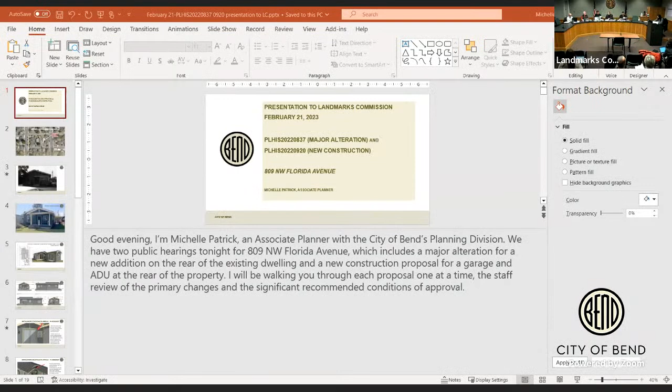Thank you, Gary. You're welcome.

So we are here today with a presentation to the Landmarks Commission for two projects at 809 Northwest Florida Avenue. We're going to go through these one by one. The first is a major alteration to the existing dwelling in the form of a new addition, and we also have a proposed garage ADU at the rear of the property.

My name is Michelle Patrick. I'm an associate planner. I work with Heidi on historic preservation projects.

So we're going to start with a little bit of an overview of the property. It's 4,560 square feet in size. The property is located on Northwest Florida Avenue between Broadway and Wall Street, and abuts a 12-foot wide gravel alley to the south. The main zoning district here is RM, medium density residential.

The property is developed with an existing 813 square foot craftsman style bungalow, constructed in 1923, designated as historic contributing in the Old Town Historic District. Photos from the applicant are primarily from the 1990s, but the earliest photo of the property is from 1960. No other historic photos were available at the rear of the property, where most of the development is taking place. The primary facade faces Northwest Florida.

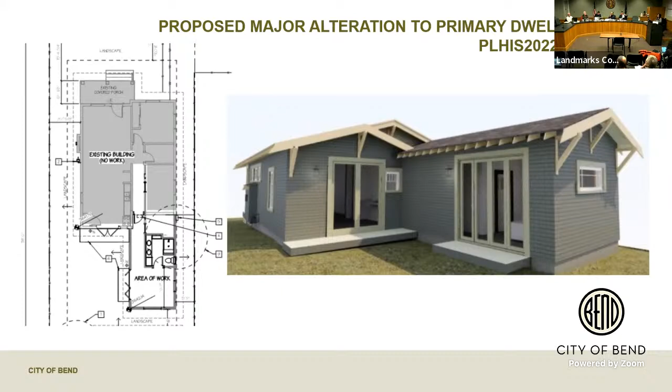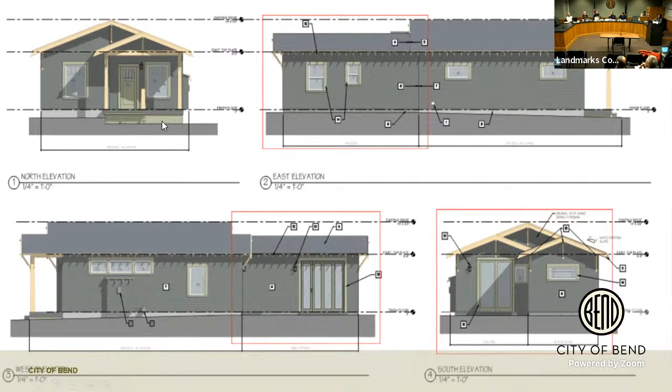The proposed details are generally in line with the craftsman style of the existing dwelling and include knee braces, exposed rafter tails, tongue and groove soffits, and smooth shingle siding with a 6-inch reveal. They've also got 2 new windows proposed on the eastern elevation, 1 new fixed pane window proposed on the south-facing elevation, and a bifold door leading out onto a deck on the west-facing elevation. As we can see here, none of these changes are visible from the front facade.

So I'm going to go through the areas we were looking at more closely and how this relates to the recommended conditions of approval. The addition is generally compatible with the existing dwelling in regards to height, massing, and the proposed solids to voids. That said, we do have a few conditions recommended to help ensure the integrity of the existing dwelling is maintained.

Some window details were provided, but we would like to see more specific cut sheets for the proposed windows to ensure the manufacturer can produce those specific styles, that they are aluminum clad wood, and that the proposed divided lights are external.

We were also a little surprised to see the proposed doorway on the existing dwelling is proposed to be widened. As shown in the plans, the applicant proposes to replace this patio door with a new doorway, but they also propose to widen the opening. This is part of the addition approved in 2013, so it's not original, but in widening the doorway they will be removing the existing trim along this window, which we found a little cramped. While we recommend allowing them to replace the door, keeping the doorway opening the size it is now would preserve the trim along the window and provide more space between these two features, which would be more appropriate.

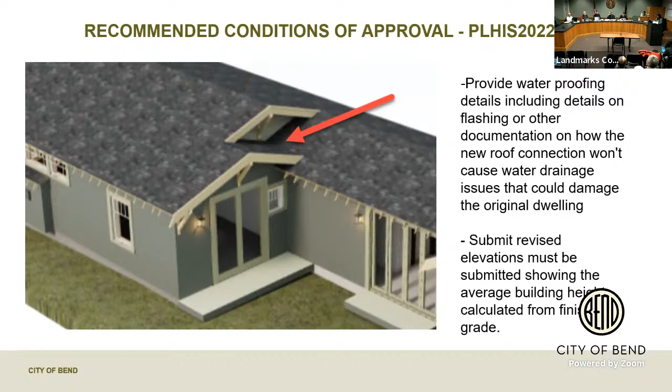Overall there are only 8 conditions. Some of the other ones not specifically referenced are pretty standard, just making sure we get all building permits in and the standards details checklist. This concludes staff's presentation on the proposed addition, and I'm happy to answer any questions.

Commissioners, are there any questions of Michelle at this time?

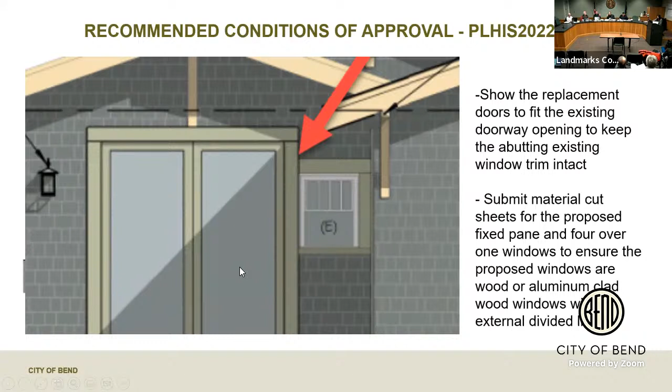Regarding the rear door with the tight trim, it shows an infill wall. Is it maybe just moving over? It showed an infill wall on the left-hand side in plan view. On the elevations, on plan sheet A2.1, detail 2, sheet note 2 says new wall infill. I'm wondering if it's not a sizing issue but a moving-the-wall-over issue, possibly to make room for the closet door to open or something.

Maybe we can let the applicant address that after. Mindy Lyman representing—oh yeah, okay, you'll have your turn as soon as we're finished with questions. We'll put that to staff, and then you're next, okay, we'll ask you those same questions.

Any other questions for Michelle? All right, thank you, Michelle. Mindy, now it's your turn. Okay, thank you.

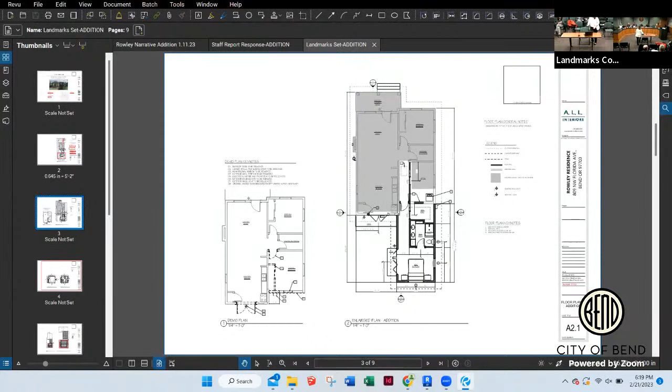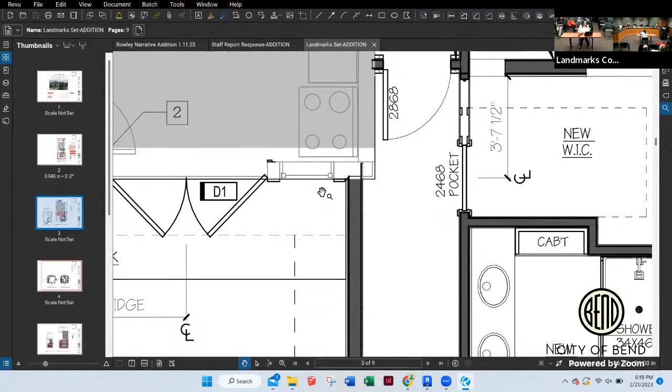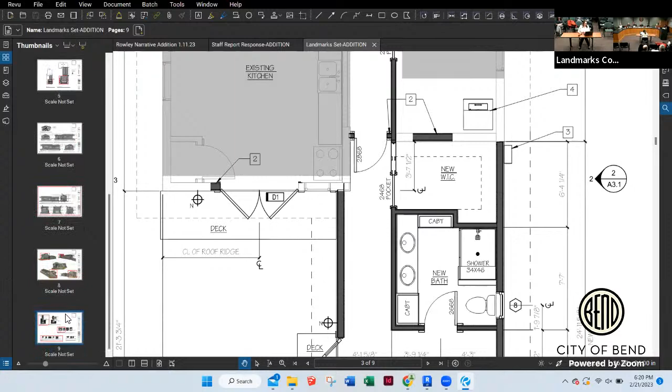We didn't want to move it. We don't want to touch it. We don't necessarily want to change it in any way. So we just bumped out the wall to the trim there. The exterior elevation then, and that door that Michelle was asking about.

Let me get to that. The door that's existing is a little bit in disrepair. We'd like to change it out. The owners would also like to add more lighting to the interior of their home. So we talked about widening it and making it a taller door. It was a 5.0, 6.8 or 7 door, and then we'd like to widen it to a 6.0, 8-foot door.

To get lots of southern light into the house as the owners would like. Also, the existing door is not centered. I can show a photo of that. So the other aspect was to center, pardon me, I need to pull up a photo of the original house, but it'll take me a moment. It's just off center to the west. So in replacing the door, we have also centered it over.

So it shoved it all towards the window. And we wanted to keep the window there without moving it. And so we wanted to integrate the trim work for the door as part of the window trim, so it would kind of act as both. Again, that window was put in as part of a 2013 addition there on the back, so it wasn't original, and neither was the door. We wanted to add a little bit more light, so that's where we ended up with this design.

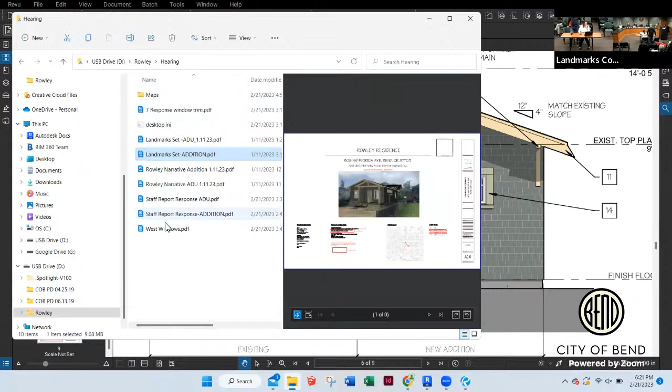Yeah, Vincent Rowley, I'm one of the owners, and I agree. I don't like the looks of it particularly, but it all fits in and it doesn't beat me over the head. So yeah, I agree. Another solution would be better, but it's really dark in our kitchen. It's just crazy dark. And the door that we're changing out was a salvage door that I put in, and it's starting to fail.

So we want to put in a clad door. So here's a photo of the existing conditions as they are right now with the new addition there and the door that they have put in that's failing. You can see there's just a tiny bit of siding between the two window and door.

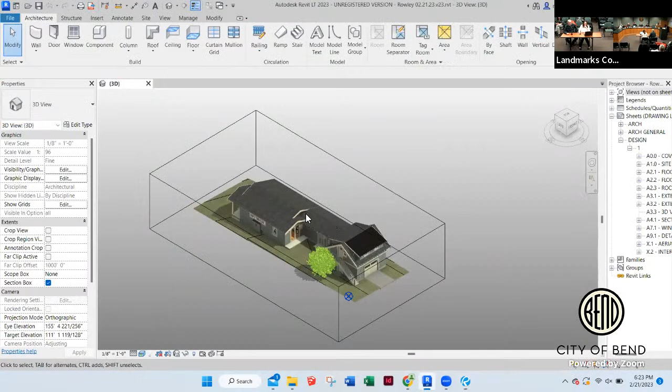Other questions for the applicants? I was a little concerned about where those two roof pitches come together that Michelle mentioned where, do you think there's going to be room to keep that knee brace if you do a cricket up there?

I don't know yet, but we're going to put a cricket in. Yeah, and we can shorten up. The knee braces have, I don't know, 6 or 8 inches. I built those knee braces out back out of salvage wood from the job site. So I can change that one proportionally and make it fit in. I mean, it's just a site thing.

Yeah, we'll look at the cricket and see how high that needs to go to the wall. Make sure we can maintain it. Otherwise, I don't know how to solve it except to adjust the size of the cricket, or I mean, the knee brace, somehow.

I have a question about the front porch. It looks like there's a little post left over. Oh, so now you want me to finish my front porch too? She's got a tough crowd here.

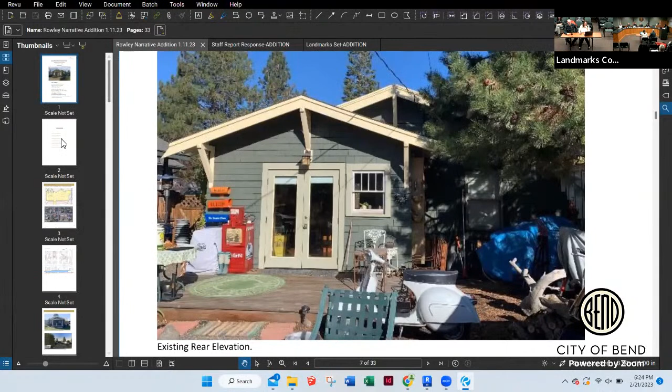I just don't know if that was a condition of approval. I'll finish it, yeah, it's unfinished at the front. I never finished it from 2013. I have the fir steps, the treads and everything in the house, I just haven't got out there and done it. We're living here permanently now, so it's more expedient to get the ghetto house on the block fixed up. We've got kind of a rough block, and this will help it a lot.

I have other questions and comments, but I want to give the applicant a chance to finish their presentation. The item about the door and the window is really the only item we wanted to see if we could maintain the design as it is, just to keep the light in the home.

The other items, I think we can accommodate - adjusting the roof height from grade, looking at the watershed, making sure we're maintaining all of the site. That was another condition of approval, the cricket, the exterior details, and all of that provided.

We're going to use Pella doors, and the divided light windows are going to be the ones approved by the National Park Service. They look like they have putty for the mullion. So they're the most expensive, unfortunately, for us, but they'll look the best too.

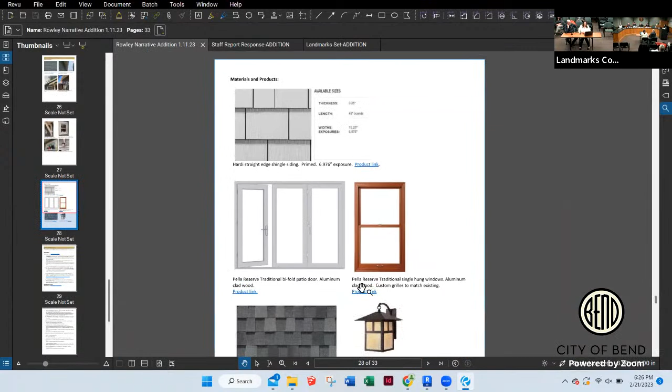In our narrative, I know I didn't do this the preferred way, but we provided some links to the products. Click on that and go right to the product, but spec sheets can be provided. That's the preferred method - we'll get all that stuff for you.

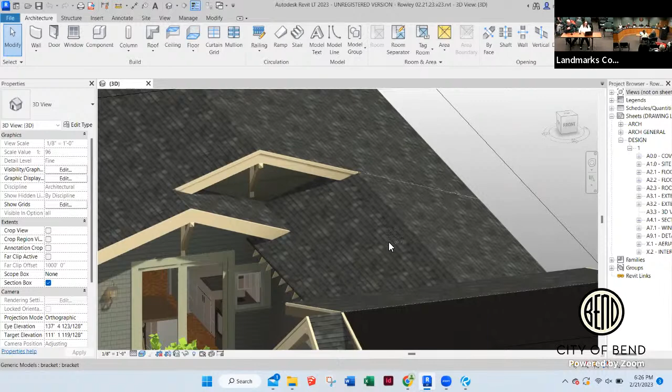We're just trying - we moved from 2,500 square feet to 800, and it's untenable. We don't like each other any longer, so we need someplace to hide out. We need a bedroom, and we're going to move our laundry from the kitchen. It's just making it more efficient. It's just too small.

And we're trying to do it in something that looks similar. Other questions, Jim?

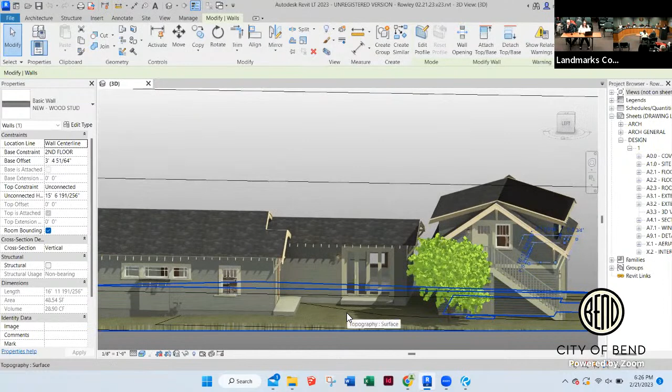There are questions and comments, probably more, some directed towards the applicant. In the staff report, there's no stormwater plan or landscape plan, and there's an opportunity to combine the two. Particularly looking at what's there now, there's not much landscape other than the apple tree - which, not an apple, but anyway.

What kind of tree is it? That's a good question. It's got berries and nice blooms in the spring. We like it, it's a cool old tree.

Yeah, because when I saw apple and the space that it was in, I was going to point out you were going to have problems with it in the future, and it might be good to include it in your landscape plan as removing it and replacing it with something more applicable or appropriate.

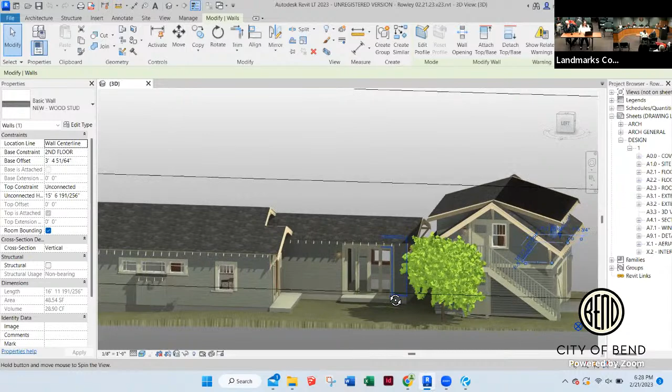I was also looking at that corner where the new portion of the structure joins the existing structure, and where the gables, the pitches hit. You've got a significant problem in that corner with water coming down onto your porch. It's going to come down that gully, hit the other roof, run around the edge, and down into the corner of the porch. Your stormwater plan should address that as well.

I'll save my other comments, because they're really just about some of the other drawings, not significant at this point. They're not really questions to you as much as back to the other commissioners and staff, so I'll wait till we go into deliberation for those.

Any other questions for applicants? Do you have plans for gutters and downspouts? We haven't really discussed it. I think drainage plans will probably help. The original house had no gutters, and the rafter tails are at the goofiest angle I've ever seen, not conducive to a gutter. They'd have to be modified, if not nipped off, which would significantly change the look of the house.

I don't know if I'm going to be looking at that in the future. So far, everything we've had for rain and snow just hits the ground and seems to disappear.

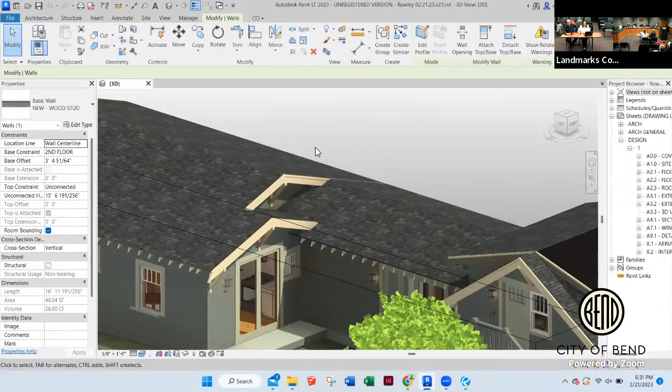The addition is going to have different kind of exterior light from the original house? Or are we talking about the ADU having different kinds of light? I think they want the ADU to, because there's an existing light there currently that was approved. It doesn't affect much, it's just a little area light.

Okay, all right. Any other questions? No? Okay, thank you very much. Any other questions for Michelle before we close the hearing? Michelle, do you have a comment that you'd like to make?

I would just add about the lighting. All lighting will need to meet the development code, which requires it to be fully cut off and shielded downward. I'm not sure if that was looked at in 2013, but any new lighting you put on the addition or the ADU will have to meet that. So based on the pictures you have now, that's not one we would allow. There may not be an opportunity to match those as they exist.

But we can talk about fixtures when you get to that point. No, downward type of lighting. Okay, all right. Well, then we'll go ahead and close this hearing.

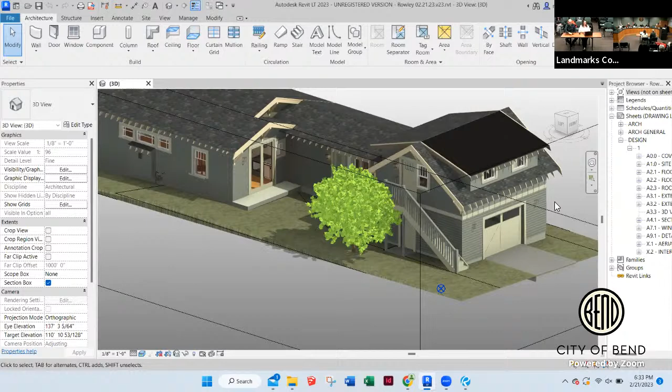Comments from commissioners? Anything? Sure, I have a couple of comments just about some of the staff comments about the windows under the eaves. In particular, I just wanted to point out, when you look at the elevations that were presented, the view line is well above street level.

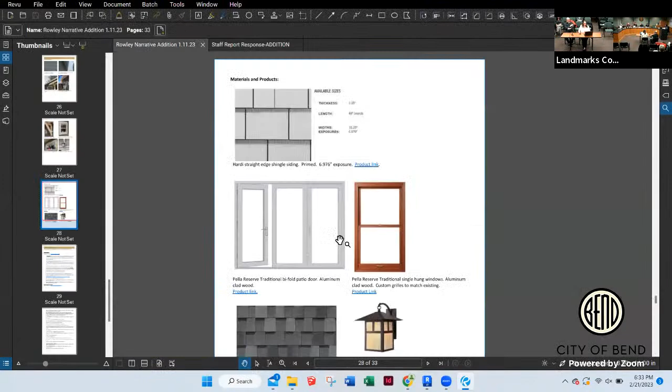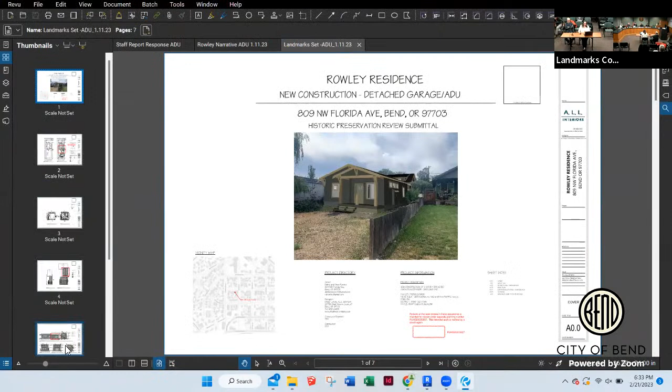And I think that's what the next project, on the next one. Is it, am I looking at the wrong one? Well, I think the comment was made in a couple of places. And just the street view from a person on the street, I don't think the conflict will be an issue. You will see the top trim, just because there's no solid underlayment underneath the fascia board.

But, quick comments for commissioners? Comment for the commissioners? Any?

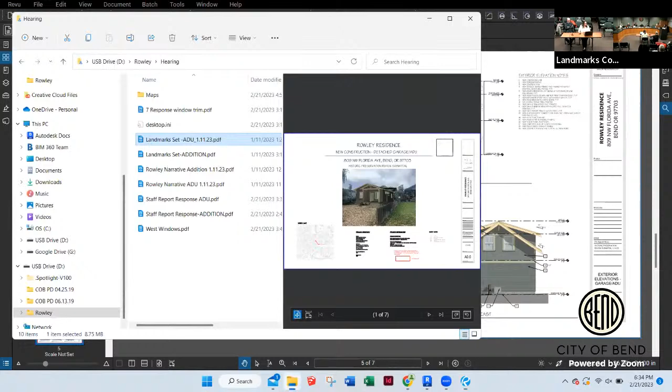Yeah, and well, I'll say on the east elevation, there's really no distinction other than foundation between the original and existing. The foundation is shown differently. It is right at the 5-foot setback, the side setback. Not a lot of width to work with there. And I don't really see any opportunity for like a jog or a trim piece or anything else.

So I think consistent with how we've approved a lot of other applications, I would say that the foundation serves to distinguish between old and new in a sufficient way to meet the Bend Historic Code. The differentiation you're looking for? Yeah, the differentiation. Oh, the roof line does give you a natural break line too, as to the addition versus the original.

You know, with landscaping and planting, the foundation is going to be all but invisible within 10 years, in theory.

Other comments? Then I will entertain the motion. Oh, Kathy, do you have any comments?

Oh, yeah, her hand is raised. Is she there? Oh, she can't talk. Unmute her.

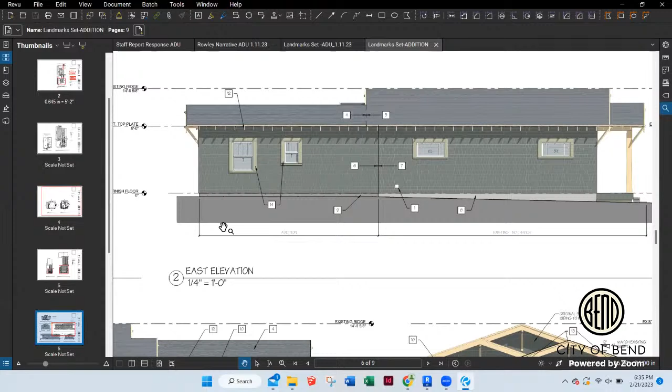I'm thinking about the trim on that back door and the window, and I believe I've seen examples of what they're proposing in other houses in our neighborhood. Given that that was an alteration in 2013 for both the door and the window, I don't see any problem with the new solution they are proposing.

All right, super, thank you. I will entertain a motion.

Mr. Chair, I'll make a motion that we approve with all the staff recommendations minus the recommendation to alter the south facing double door.

Okay, and this is the ADU. Let me have his recommendation. Maybe that's right here, Jerry.

Maybe it's not. That means an approval with the recommendations: number one, building code permits; number two, standard details checklist; prior to issuance of a building permit, the submitted site plan must be revised to deal with stormwater. The fourth recommendation, exterior lighting shall conform. That was one of the recommendations. That's a flare down. Building permit revised elevations - the plan must be revised to show the replacement doors to fit the existing doorway.

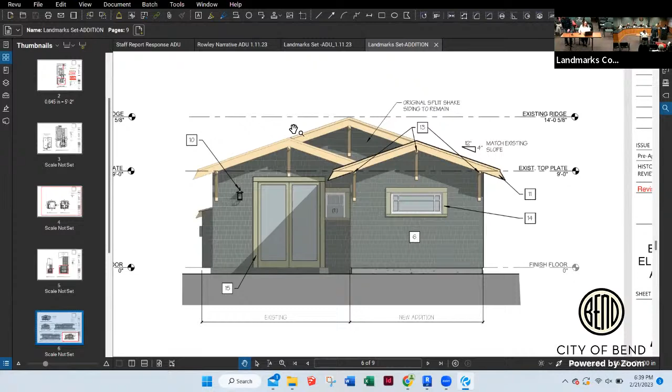The addition is approved. Okay, now let's move on to the ADU. I lost my sheets again. Maybe I'm gonna steal the screen from you. Okay, briefly, and then I'll have it back after. Don't need to do anything to let you have it. I think I got it still, yeah. All right, now that takes us to item 5 on our agenda.

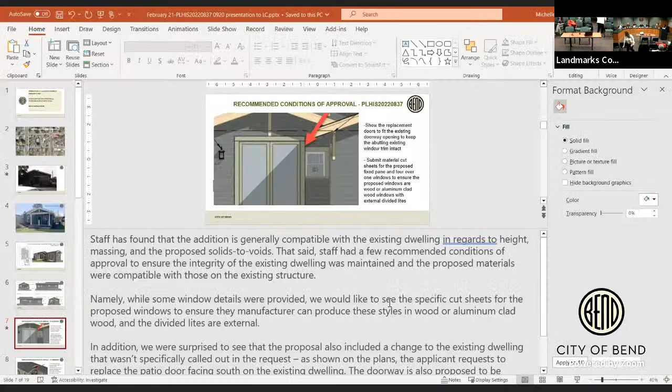Public hearing PLHIS 202209220. This is the de novo hearing and is an initial evidentiary hearing of PLHIS 202209220. This application is a request for a garage and ADU, accessory dwelling unit, at 809 Northwest Florida in Bend, Oregon. The applicant has the burden of proving that he or she is entitled to the approval sought. The applicable criteria for this application include the Bend Urban Area Comprehensive Plan Chapter 3 and Chapter 10.2, Historic Preservation Code, and the Secretary of the Interior's standards for the treatment of historic properties.

Testimony and evidence at this hearing must be directed toward the criteria set forth in this staff report or other criteria in the Bend Comprehensive Plan or Bend Development Code that you believe is applicable, or any other criteria in the National Register of Historic Places program that any person believes apply to this decision. Failure on the part of any person to raise an issue with sufficient specificity to afford the landmarks commissioners and parties to this proceeding an opportunity to respond to the issue precludes appeal to the City Council or Land Use Board of Appeals on that issue. Additionally, failure of the applicant to raise constitutional or other issues relating to the proposed conditions of approval with sufficient specificity to allow the Landmarks Commission to respond to the issue precludes an action for damages in circuit court.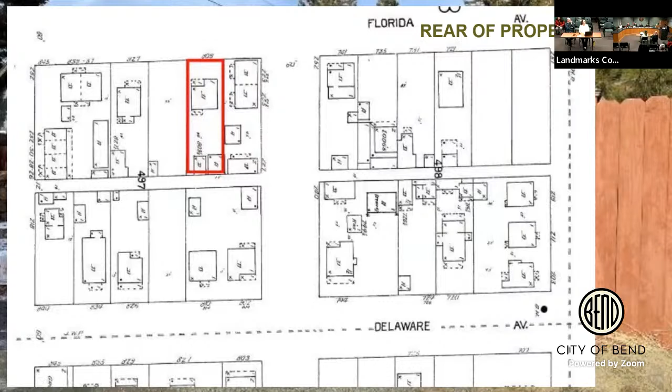So the new 2-story structure incorporates craftsman details very similar to the proposed addition that we just looked at, including aluminum clad wood windows, knee braces under the gabled roof line, exposed rafter tails, tongue and groove soffits, fascia with 2-inch trim, and straight edge single shingle siding with 6-inch reveal.

On each of these elevations, we've got 2 fixed pane windows with divided lights proposed on both the north and south elevations on the dormers, and on the 1st story of the north facing elevation. The east facing elevation contains 2 4x1 single hung windows, and the west facing elevation is entrances, so you've got a man door to the garage, your primary entrance for the ADU, and another 4x1 single hung window just adjacent to that door.

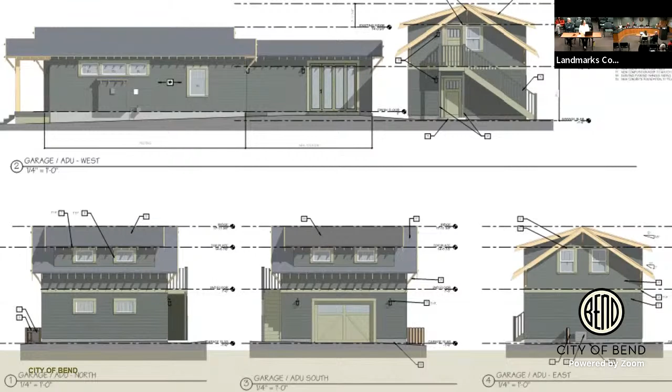I did want to talk about building height for a little bit here. The burden of proof continually references the proposed height of the ADU at 17 feet, 11 3/8 inches, and that is shown on here as well. But this is measured from finished floor, and building height needs to be measured from finished grade.

When we measure this from finished grade, the proposed ADU and garage is actually 19 feet, 5 1/2 inches in height. Keeping that in mind, the applicant did provide some detailed information on how this perceived height is actually a little bit less. They are proposing to grade the rear of the property, and you can see a little bit of a slope going back towards the alley, so the garage will sit a little bit lower than the existing dwelling. They called out 14 inches, but that's again measured from finished floor, so it looks like it's about 10 inches from finished grade as far as that elevation difference.

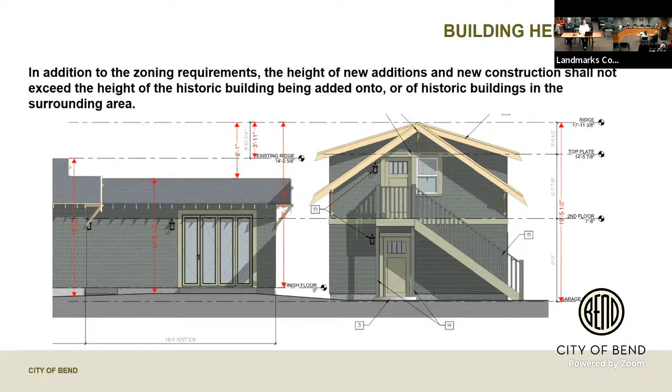All in all, the 19.5 feet does exceed the height of the existing primary dwelling and the historic contributing garage, which is the nearest historic contributing structure to the property, just directly behind it. This is 810 Northwest Delaware that this is addressed on. I don't know the height of this structure per se, but it looks about 15 feet, and I'll let anyone refute that if they have a better measurement estimate.

But so in general, this block does not have that many contributing structures on it. The nearest one on the block is 827 Northwest Florida, which is 2 properties away.

This proposed structure doesn't necessarily exceed the height of other historic buildings close by, but there are a number of examples in the staff report showing new construction or historic buildings being around 20 feet or more. So it is comparable in certain ways.

The applicant also provided an exhibit of the slope on this block. You can see, just looking at the property at 809 Florida, it drops down slightly from right to left. So the perceived height of the garage and ADU at the back of that property will naturally be diminished due to it being at lower grade than the properties further west, and the other historic contributing dwelling on the street, 827 Florida.

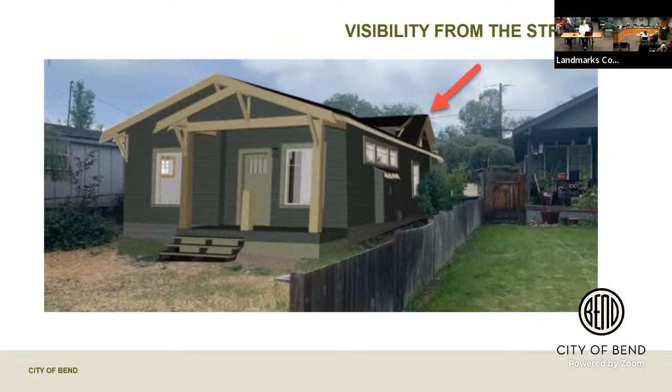This is a rendering the applicant provided that shows the ADU's visibility from the street. These are only renderings, so this is approximate, but I think it helps demonstrate the potential view from Northwest Florida. This existing tree, of undetermined species, will help screen it slightly from view. And notably, there's another large willow tree on the neighboring property to the east that will also help screen it from view on the other side.

Based on the proposal, we do have a few recommended conditions. First and foremost is making sure the height proposal is shown accurately, so we'll ask that these elevations be revised to show it from finished grade and calculate the average building height, so we have an accurate idea of what's being proposed.

We're also recommending that the applicant provide additional grading details in the form of a grading plan, so we have a better idea of the extent to which the rear of the property is proposed to be graded.

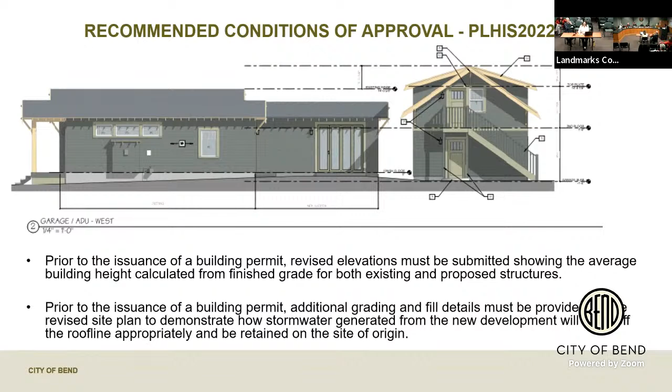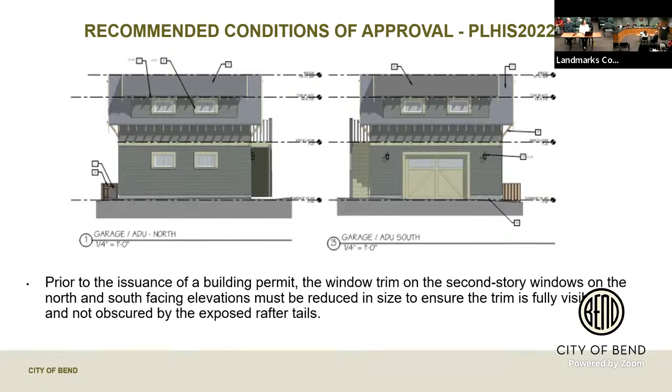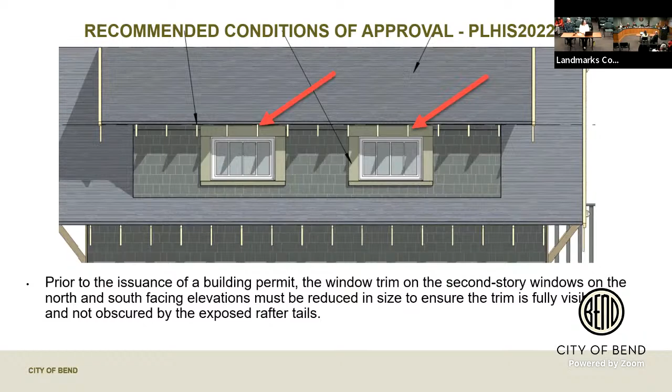Moving more into the design of the garage and ADU, we had several recommendations regarding the proposed windows. The second story windows are slightly obscured by the rafter tails extending from the eaves along the north and south elevations, so we recommended the window trim be reduced in size slightly to ensure it's fully visible.

Similarly, the placement of windows and doors in the east and west facing elevations leaves them partially blocked by the fascia board. Along the east facing elevation, we recommended these windows be reduced in size so you can fully see them, or preferably that there be one window on this elevation, which is common practice under gabled roof lines in the historic district.

On the west facing elevation, the issue of trim visibility is replicated. We recommend the door be relocated a bit further south so you can see the full trim and it's not obscured behind the fascia board. We also found that the 4x1 window directly adjacent to the door felt a little cramped under the roof line, and recommended a smaller window be installed with fewer or no divided lights to help keep the balance of glazing on this facade.

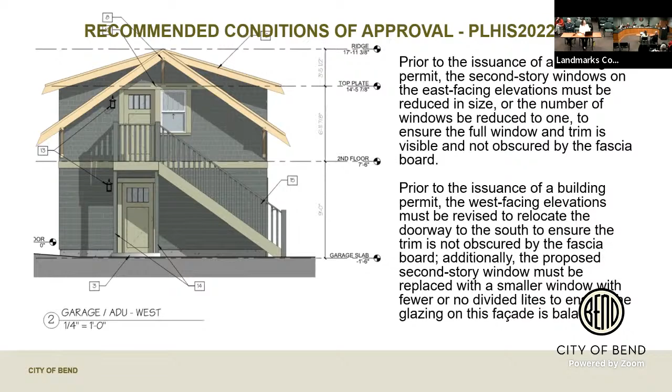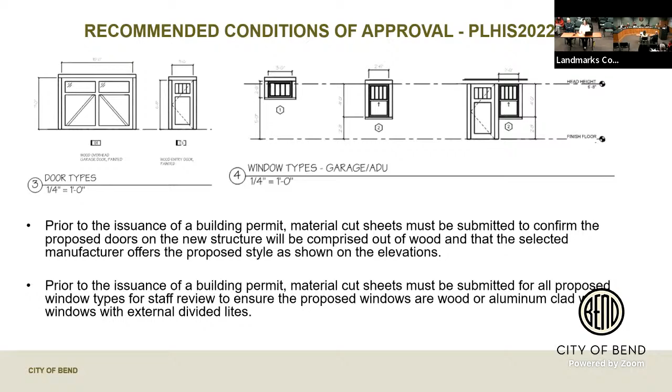This is just a general recommendation that more specific material cut sheets be submitted to confirm the manufacturer offers those proposed styles as shown on the elevations. We did get a very specific link to the overhead garage door, which I thank you for, and just to confirm all those proposed styles can also be produced in wood or aluminum-clad wood.

There were a few more recommended conditions of approval with this one that I'm sure we'll discuss. The ones not referenced were pretty standard conditions. I also forgot to mention we did have one public comment submitted prior to the hearing, in support of the proposal, and they also supported the addition. That's the extent of the presentation for the new construction.

Questions for Michelle and commissioners? No questions for Michelle? Okay.

Applicants, if you'd like to make the presentation. Thank you. I think you should still have the powers to share. If you don't, let me know.

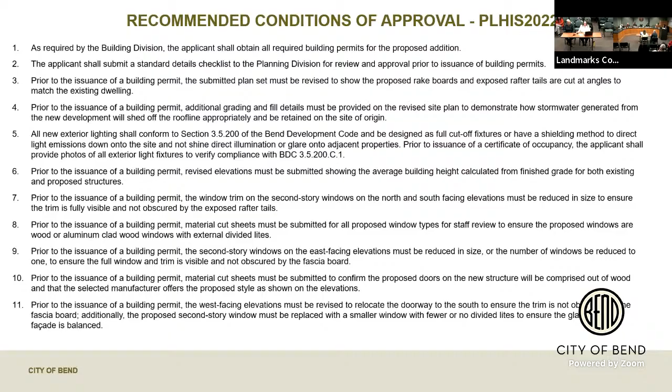Again, like with the addition, the majority of the conditions find no objections from our end. We plan to fully provide the information as far as items 1 through 3. I'll just go down the list.

Item 4 has to do with the water shedding issue. With the ADU, we've reduced it below grade slightly, and we may have exacerbated that issue a bit. The slope of the roof going north-south means a lot of that water is coming straight toward the alley or back toward the property, so we don't have the opportunity to go off to the side, which would have a little more absorbing ground to cover. Although we do propose permeable pavers in the driveway to help with this.

What we'd like to discuss is, in part of trying to remedy the water shedding issue and keep it all on site, and also not flood the Rowleys' new garage, perhaps to actually bring the ADU back up to grade a little bit, so we don't have that sloping back toward the building issue.

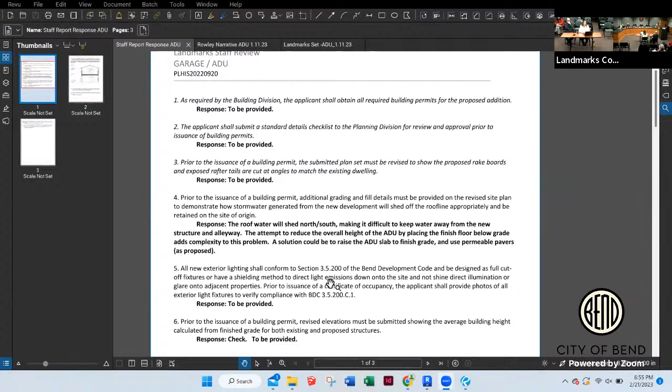Specifically, then how high would the ADU be? My calculation was 17. Michelle, what was your calculation? From top of the ridge to finished grade, I had 19.5.

That is, we go from this slab, 19 feet 0.5 inches, so we'd be adding 10 to that. It takes us up to, what was that, 19 feet 10.5... 19 feet, 10 inches? Okay, thank you.

So that was that item we wanted to add to the table, maybe for discussion, because maybe it'll help us with the water issue. The other item, that was item 4. Item 5, exterior lighting, will provide something that meets the requirement.

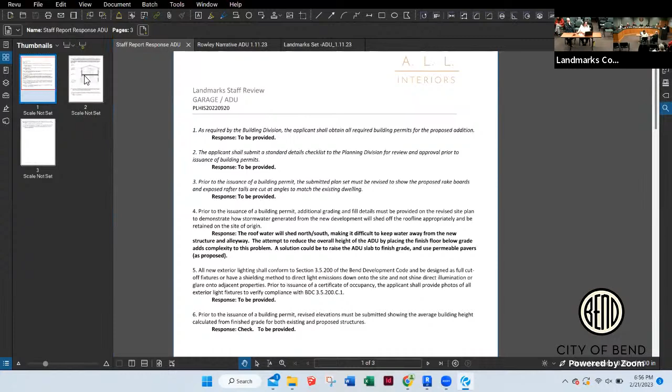Average building height, yeah, it's just a calculation, not a problem there. Number 7, and I think we also had the window and door heights being cramped under the elevation. I'm providing this section to show how, in addition to trying to get the building a little below grade to minimize its height, we've also really shrunk down that upper level of the ADU.

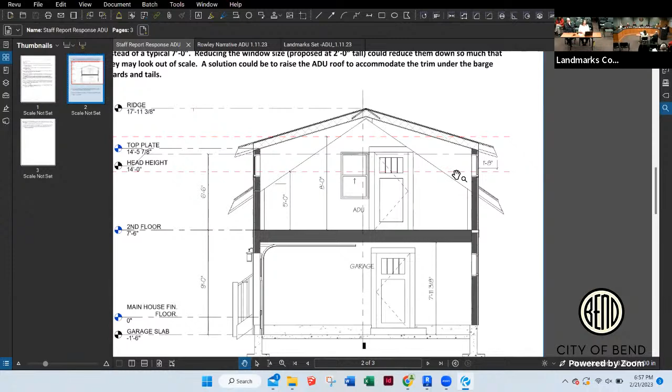This red dashed line represents the 8-foot head height. We're trying to keep that down as much as would be comfortable while meeting interior code, and just trying to keep the overall massing to a minimum. So it's created a bit of a cramping issue with the windows and the door.

I think there are two ways we could resolve that: lifting the ceiling up a little more, or—because right now the head height for the windows is already at 6'6" and the door is at 6'8", so that's pretty low—if we shrink the windows, I wouldn't want to shrink them from the head height.

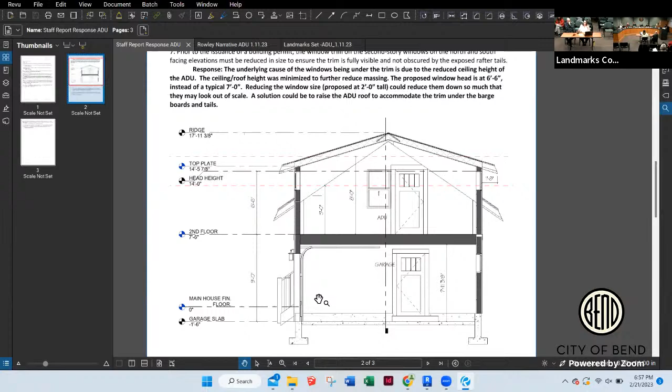Let me go to an elevation here. Would you not then have an issue with egress on the one-bedroom window, if you brought the sill head up, if you were to shrink the window?

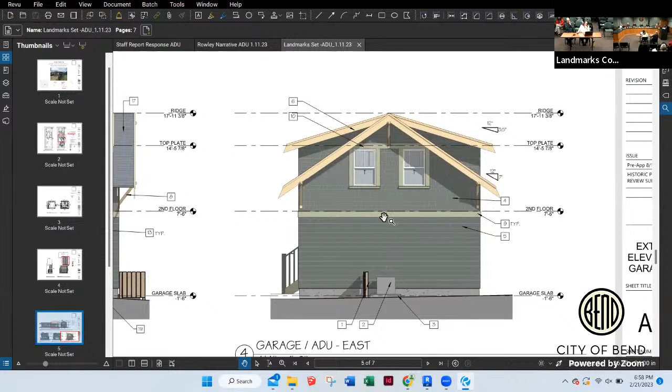Yeah, that'd be another item. These two windows on the east elevation, it was recommended that we go to one. On the interior we do have a wall here separating a bedroom from a bathroom, but we could bring them a little closer together to help with that.

And these windows here, under the rafter tails, are below the rafter tails as the rafter tails slope up, so the window trim wouldn't be in contact with the rafter tails. From the ground level, looking up, I think that trim would be fully in view.

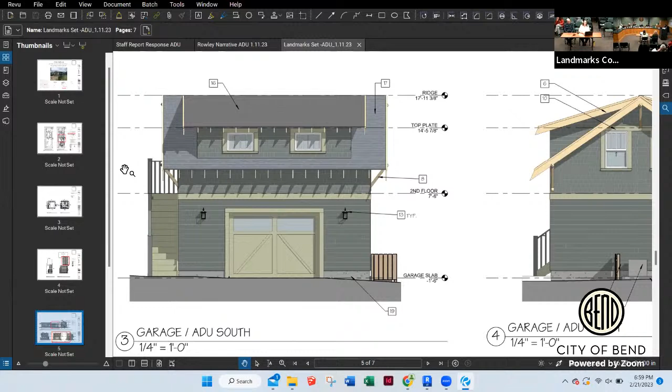Shrinking these down might also make them a very odd size. Right now they're 2 by 3, which seems fairly typical, although I know there are smaller windows in the district we've seen. So we'd like to keep them the same size, just to avoid them getting so small that they look kind of dinky, for lack of another word. We'd like to keep those windows on the table.

We could adjust how far these windows are apart, possibly look at the size, but one of these would be an egress here on the east elevation. And the door and this window here, I don't think we have any issue with shrinking the side window.

I don't want to push the stair forward back into the alley any further into that 12-foot setback, so it's positioned where it is. To be honest, both the grading and this window issue, we tried to mitigate the height because we thought we'd get pushback on the height. I'd like to see this 3 inches, or 3 feet taller, so the windows and height in there, everything could be built back up to grade. Everything that's been done has shrunk this thing and put it underground so the commission would approve the height and massing.

So if we could get some relief, I mean it's not exceptionally high. There are 2 houses on the block that are equally as high, and it's in the alley. If we could get some relief on that, I think it'd make this a better project for everybody, including the people, the munchkins, that have to use the ADU.

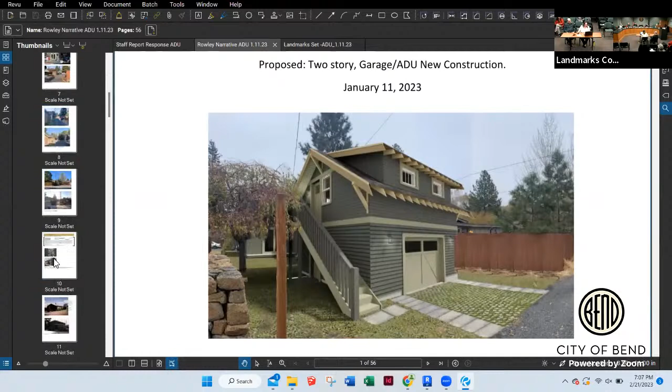Sorry, and we'll go ahead and do comments, couple small things. I wanted to harken back to our narrative and look at a couple of precedents.

This structure, there, 430 Florida. There aren't a lot of examples, just a couple. We searched very hard out in the snow, walking the streets, looking for 2-story structures that resembled what we were trying to do. This was one of them, down the street at 430. I think this was constructed in 2014, so a little while back, but it has a very similar look and feel to what we're presenting.

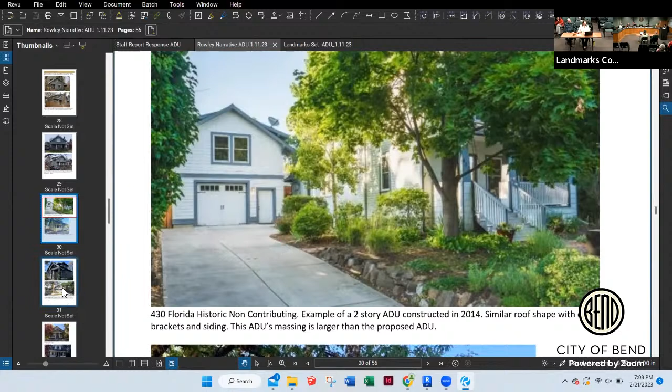But actually what our design proposes is a much smaller structure. I don't know exactly how high this is, but it is definitely wider. So, considering the proportions, it's probably pushing above 20 feet. It is a 2-story home next to it. So there's that, and I have another example somewhere too.

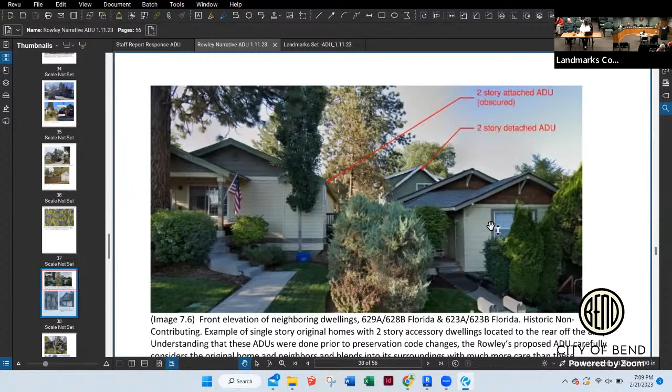And I think that maybe concludes, unless we have anything else. No, I think the only stumbling block was those window heights and the grading.

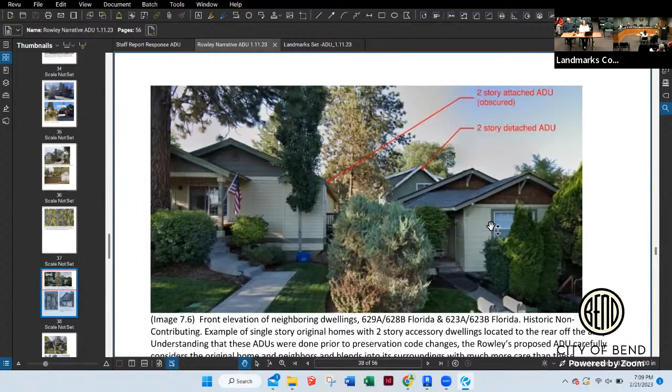And what is the elevation relative to your finished floor datum of the alley? Is the alley higher than?

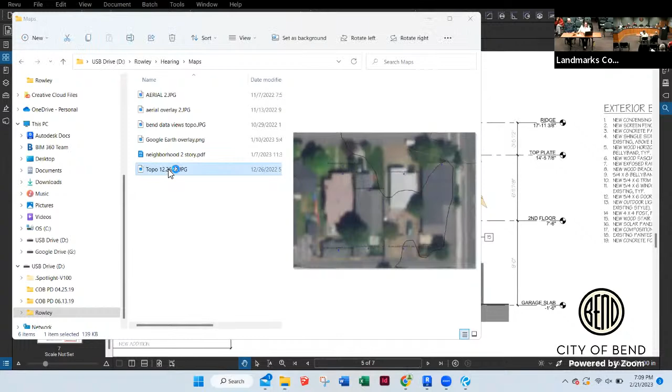Let me share with you how I came up with this information. This might - what you're looking at is national data, anyone can look up online. You pick a point and you get an elevation. I know it's hard to read. You can see the grade coming from north to south, and then on the back we've got this steeper grade. That contour line shows us that we're crossing over a foot line.

And from this point, this is 3,641, and the neighbor is 41, and this is 3,642 and a half. So it's about a foot from here to here. I know that's not exactly what you're asking, but that's the closest information that I can pull up right now.

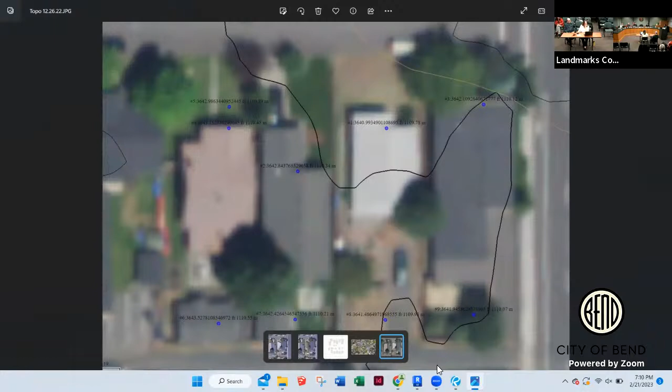I think our elevations are off the finished floor and not off the average of the site, as Michelle suggested. But Michelle has our building higher, and yet it's below the average. So I'm confused by that also.

Yeah, Vince is correct. So my 17-foot 11 3/8 is from 0 point, which I put at the finished floor of the main house. That's the base point I was using. Yeah, and then finished floor of a garage is ground elevation, unless you have a ramp or something - no, we're just gonna do slab on grade. So that puts the total height at more like 19'6", just under 19'6".

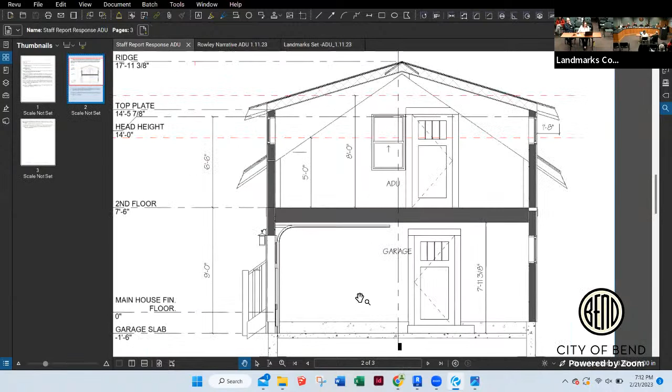You've suggested you'd like to move the grading up 10 inches. Well, it'd be more of keeping the grade where it is, from the presented elevation. And then there was a second proposal to make the top plate, the distance between the second floor and the top plate, higher by 6 to 8 inches.

So right now top plates, with 0 being finished floor, 14 feet 5 and 7/8 inches. Okay, so we're 21 feet above grade then. 21 feet above grade.

Any other questions? Go ahead. Can you describe the material that you plan for paving the driveway?

Yeah, I don't think we included that in the narrative. We haven't picked a product, but it'd be a pervious paver of some sort, just interlocking type things. Depending on the absorbency and how much water goes through, we could play around with the products available to get what we need.

I'd prefer not to have it sloping down into the garage, but from the comments, I think the logical thing is to gutter that back.

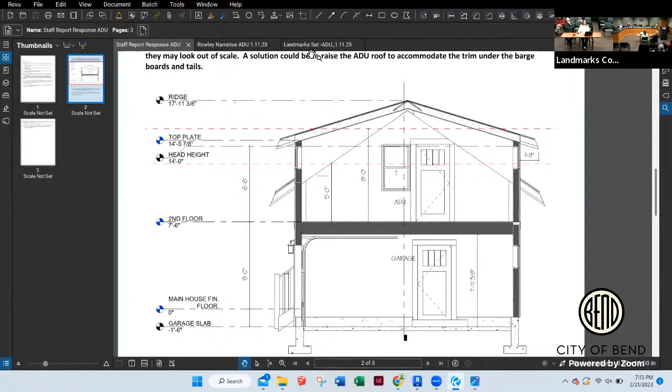West line. So go to the roof, the south elevation.

Am I understanding you correctly that the center line of the alleyway is higher than the slab? Yeah, by 14 inches. We did that to mitigate the height.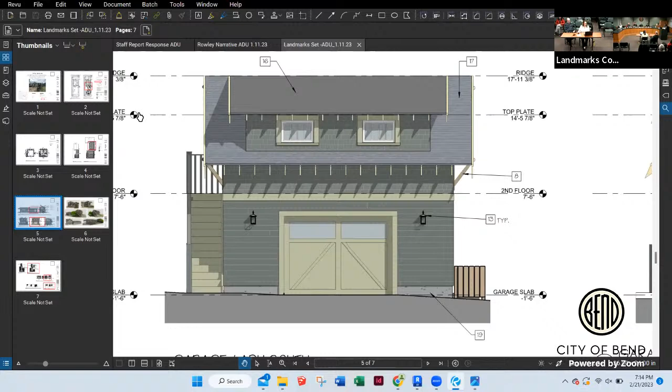Okay, sorry, one more. You're in control, right, Mindy? Okay, can you go to your sheet, just the exterior elevations, A 3.2?

The top right elevation, that's going to be the west elevation, right? So the rafter tail, the angle on the rafter tail, I think that those are parallel - are you maintaining the same angle in space relative to the ground, rather than the same angle relative to the building height? I'm wondering if that was intentional or if you had a reason for that.

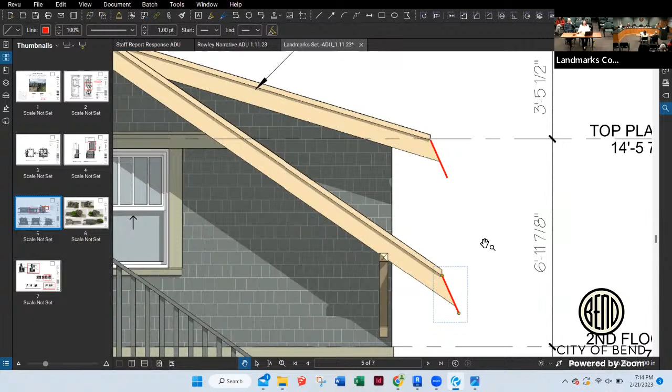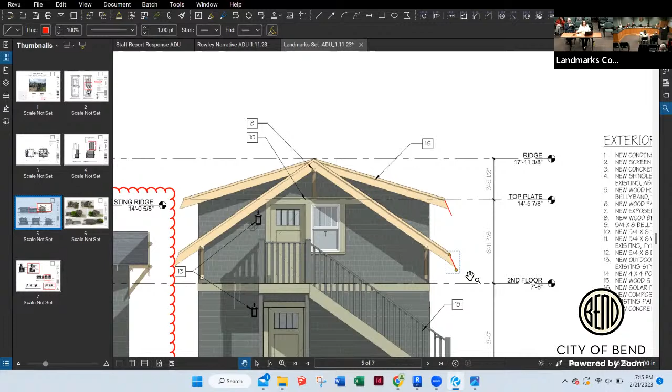Well, I don't have a precedent from the original home for this slope. This slope is much closer to the original home, and I was able to estimate what that gutter angle would look like. So this steeper slope on the ADU is purely one way to do this - not exactly sure what would be appropriate, and I'd definitely lean on your suggestions on what that angle should look like.

Yes, it is the same angle relative to the ground. If we did the gutter though, that would just be a barge rafter covering the end of the gutter, and you just lop off the tails, or plumb cut and then run the gutter. Those barge rafters at the end, you wouldn't see the gutter - that's the way I would do it. That might get complicated, might need a little block up there or something.

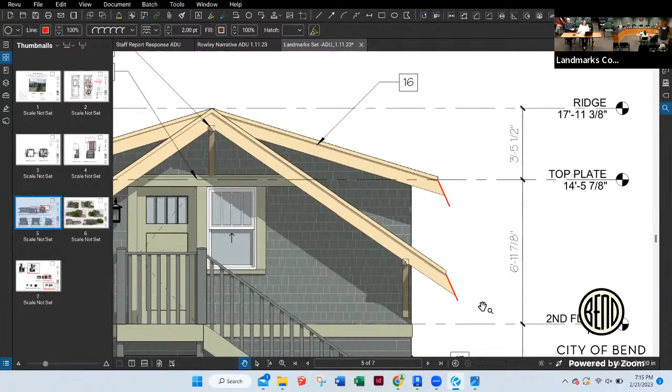Any other questions for the applicant? Is there anybody out there who would like to speak in favor of the proposal?

Go ahead, you certainly may, if you wish. Is there anybody? Did you come forward if you want to speak? I realize you own it. Oh man, you unleashed it. Go ahead and state your name, please.

Hi, my name is Debbie Rowley and I'm an owner. Vince and Mindy have spent a long time on this, and one thing that I think is important for you guys to know is who we are. If you've ever been down 809 Northwest Florida, it's a pretty scary neighborhood and it's a dump.

We're willing to put in $450,000, maybe $500,000 into this house because this is where we're going to live. We sold our house in Seattle recently in August, and now we're here full time. It means a lot to us - this is the house my husband and I are going to die in. It means a lot to us to have things done right, and they've spent a lot of time making sure that we were doing things the right way.

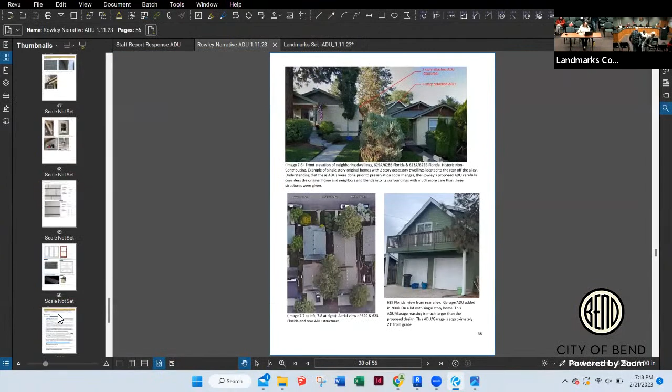Where's the link to Debbie's video in the narrative? The alley is depressing, it's dilapidated. Was there anybody else on the video? We have no one raising their hands to speak.

Okay, is there anyone out there, either here in the room or on the internet, who would like to speak against this project? I'm not seeing any hands raised to speak against the project, so I'm going to go ahead and say no. Okay, thank you very much.

Michelle, would you like to make a closing comment? No, I think there's a lot of information getting bounced around, so whatever we decide on, just make sure that we have a specific path forward, that would be helpful. No further comments. Okay, thank you. Well, then we'll close the public hearing.

Comments from commissioners? Sure, now that I'm on the right page. As you know, I don't have an issue really with the placement of the windows relative to the roof line and trim. I think street view, walking by, you're going to see it. I think, given the scale of the house and the scale of the addition, it's tight, it's cozy. It just sort of fits that tight and coziness.

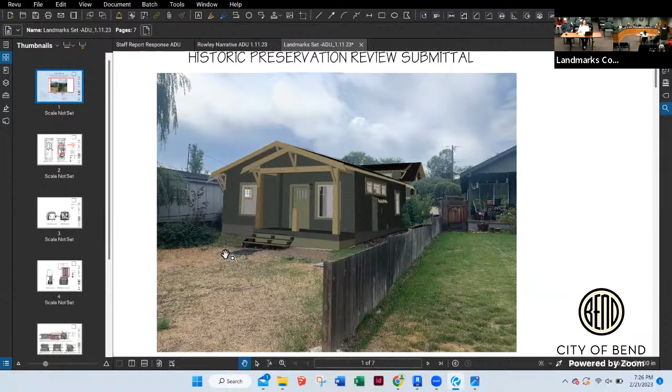Going up at grade is one thing that I can see the necessity for the stormwater. I can see the necessity for making things work on the site, especially with the alley being 14 inches taller at the center line. Raising the plate heights is a different plan, and that would be a different submission to me. In looking at the plan as presented, with taking that box and just simply moving it up at grade is not a substantial change, and I don't see that as being something that would trigger a redo. But changing the plate heights, because all of a sudden you have different solids to voids, you've got different trim lines.

The only other thing I saw is on number 3 on the staff recommendations was the exposed rafter tails, and I think that the potential for there need to be a gutter on that garage side, where the barge boards are cut to the angle but the tails are clipped off, might have to be noted if there were to be a motion in that regard.

And yeah, I do think number 7 and number 9 on the windows could be eliminated.

I usually don't make comments, but I think in this case, we need to deal with the presentation of the project that we have in front of us, rather than going back and now, well, maybe if we did this or maybe did that, and on and on. That could be endless. We could be here all night if we tried to help you be an architect, which I am not. We certainly would take a long time. So commissioners, I would certainly want to focus in on what we have here in front of us.

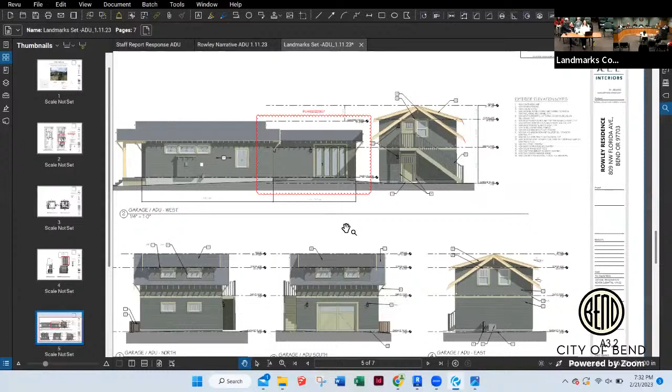So we are going to want to have language in number 3 that allows for the rafter tails on the south side to be able to be altered for the application of a gutter if needed. That's item number 7, and item number 9 be eliminated from the staff recommendations, so that the windows may remain as presented. Also number 10.

And then adding my two words to item number 4, stormwater management following grading. Item number 4, you want stormwater management to be part of your motion? Yes. Okay, that's it, collaborative.

Anything else you would like to add here? No, at this time. Oh yes, I do - that the grade may be brought back up to aggregate grade approximately 10 inches higher than is presented, to match the finished floor elevation of the proposed... yours probably wouldn't match because we would have a, yeah, just that grade.

That would be a separate recommendation, number 12. Well, for eliminating 7, 9, and 10. Okay, so then the grade brought up approximately 10 inches. We had the one about the condenser unit lines being interior. And which else was that?

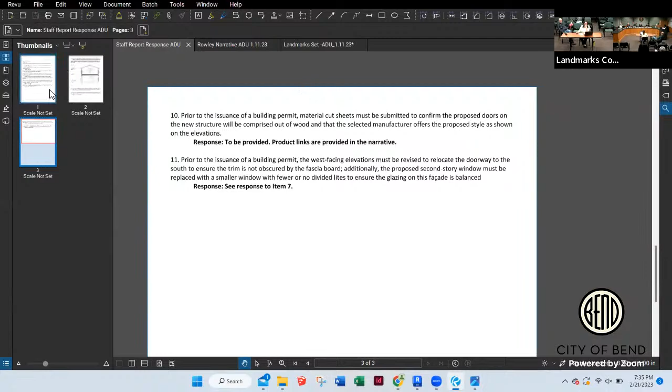The motion was approved as presented with staff recommendations, with a modification to number 3 that allows for the rafter tails to be cut to allow for gutters. Number 7 is out, number 9 is out, number 11 is out, and the windows may be built in as presented. Number 12 would be that the grade go back to the approximate 10-inch rise of natural grade, increasing the building height by that 10 inches based on grade. And number 13 is that the HVAC lines coming off the condenser unit are internally mounted rather than external.

There was additional language on item 4 - I got a note about stormwater. I specifically added that because they were grading the site, so we can still ask for a stormwater management plan, but we don't necessarily need the grading and fill details if they're not doing that. I can modify that - I apologize, I'm a landscape architect and I do grading and drainage, it's never just one, usually it's the same plan. I'm not allowed to at this point. Michelle, go ahead and run with it, renumber those recommendations, taking out the items.

Any other discussion on the motion? Andy, you look like you want to say something. I'm not thrilled with the rafter tails being different on the south elevation than they would be on the north elevation. I understand what we're getting at here, but I don't think it makes sense to change the symmetry of the rafter tail angle.

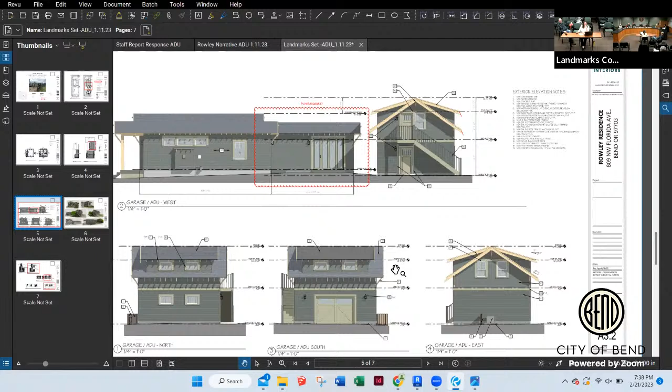Would you like to make an amendment to the motion? I'm not sure what amendment I would make. If they cut them square, that would... I'm not sure that would be consistent with what we're looking at. But I would say that if the lower rafter tails matched the acute angle of the shallower roof, then you'd be in a less...

Still would be hard to put a gutter on that, yeah. And for the water mitigation, I worry that if number 3 stands as it is, you have created a situation where a gutter could not be put on there. The leeway is in leaving the barge rafters exactly as is, but at the tails where the gutter is - in a perfect world you design a gutter to look like the angle of the tail, but that's not going to happen.

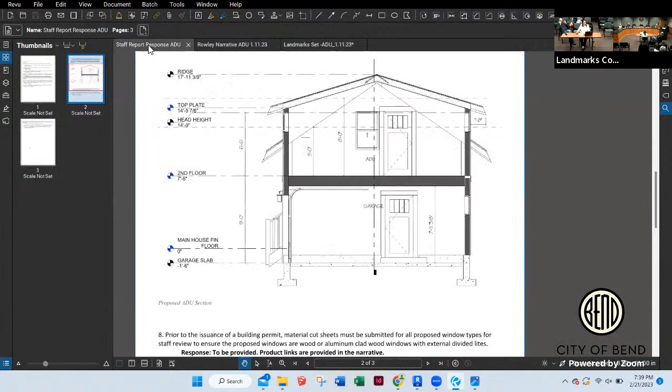I just saw it as a good compromise on that one facade. I mean, are we sure that they need gutters now because we've raised the height up 10 inches? So I was going to suggest that we just remove condition 3 entirely. I would make a motion - can I make an amendment that we remove condition 3 entirely? Would you consider that a friendly amendment? I would. Okay, so then number 3 is crossed out as well.

Yeah, I think removing number 3 - basically runoff is going to come off the roof onto their driveway, which is porous pavers or permeable paving. There's a difference. And then run down the driveway if they raise the elevation, and they're going to have to deal with it at the driveway grade, alleyway line, or before that. So it just goes back to some of the stormwater management at that point, and whether or not we've dealt with it. You don't want a car wash if it's a heavy rain as you exit the garage.

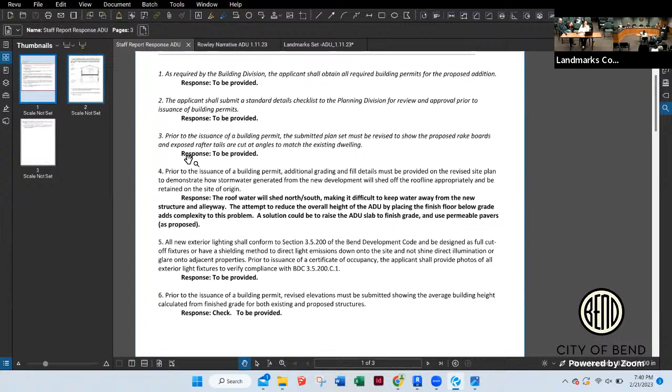Which isn't a bad idea, but it also makes snow removal challenging when we have heavy snows. I have a slope that comes down to my garage, and I learned to extend my roof rake full length when I rake the snow off the roof, otherwise you're in a small avalanche. When we've had those 3-foot snows, it gets quite challenging.

Does anyone want to second my motion to remove the amendment? Eric made the motion and accepted it as a friendly amendment, so it doesn't need a second. Now we need to vote on the revised motion, leaving number 3 out but everything else on the original motion still on the table.

More discussion - not to belabor this too much, but if we eliminate number 3, we're essentially giving them permission to cut the rake boards straight, right? I would contend that they've presented it to us as presented. That makes sense, I just want to make sure it matches what we're approving matches what's on the drawing.

Any other discussion, commissioners? I will call the question. All those in favor of the motion? Aye. All those opposed? Motion carries.